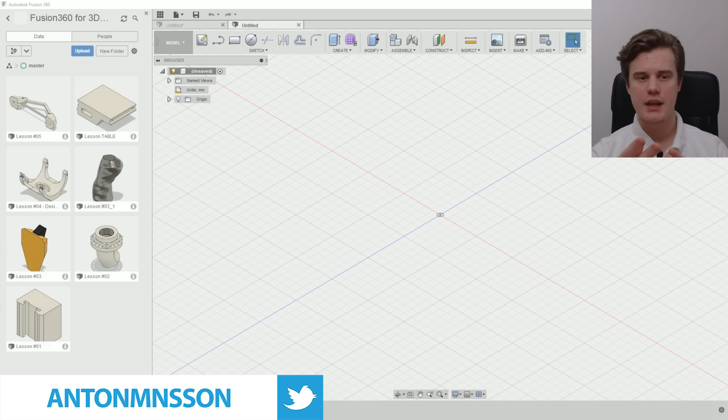Hi guys, so today we'll be exploring Fusion 360 with the focus of 3D printing our parts. Today I want to do a shampoo bottle. I'm going to combine and show you guys how you can combine a solid model, for example the cap, and then a free-form model or a T-spline body, which is a form. So I want to mix those two together and try to add as much detail as possible. So with that said, let's just jump into the software and start going.

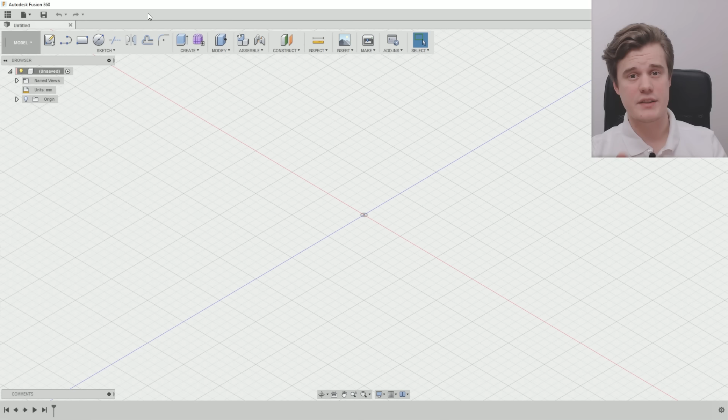Alright, so this is Fusion 360. You should be pretty comfortable with this software by now if you've been watching my videos. We have the previous videos here, at least most of them. So, a shampoo bottle - when I look at one, for me it consists of two parts: the more construction parts, the CAD parts, usually at the top, the cap which you twist on, or a lid, and then the rest is the body itself. So today I want to show you tools to handle that.

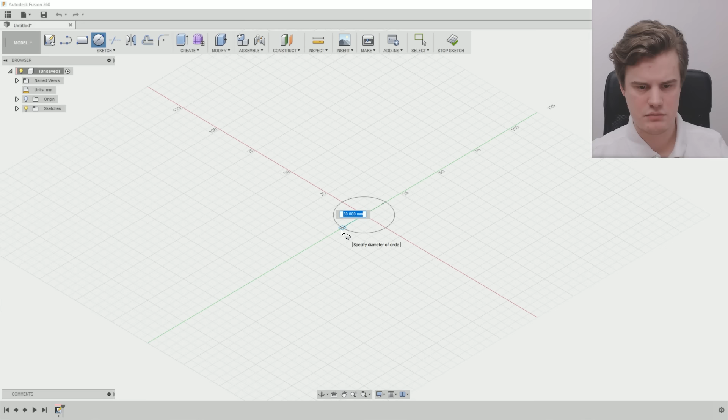I actually want to start off with a solid body. So for the cap, we'll go ahead and do a cylinder. I'm going to make it, let's say 30 millimeters - that sounds pretty decent. This will be the inside where we then put a cap on. So let's say 30 millimeters... it's a little bit tall, let's say 25 instead. So that's it, now we're finished.

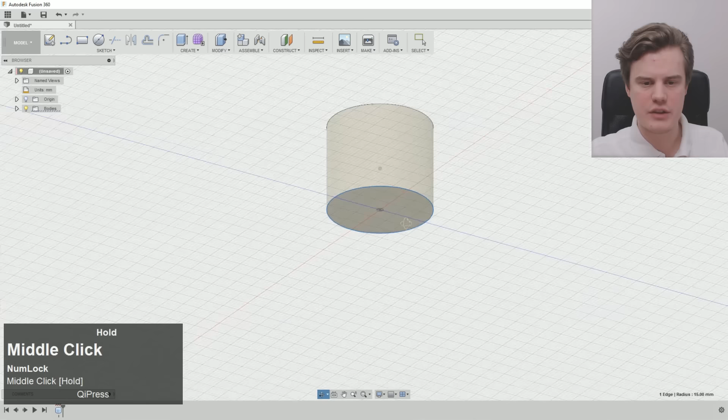I'm just kidding, we have a little bit more to do. The reason I'm doing this is because I want to have a cylinder shape, so I can then go back and stick my freeform to it. So this will be here, I will call this cap.

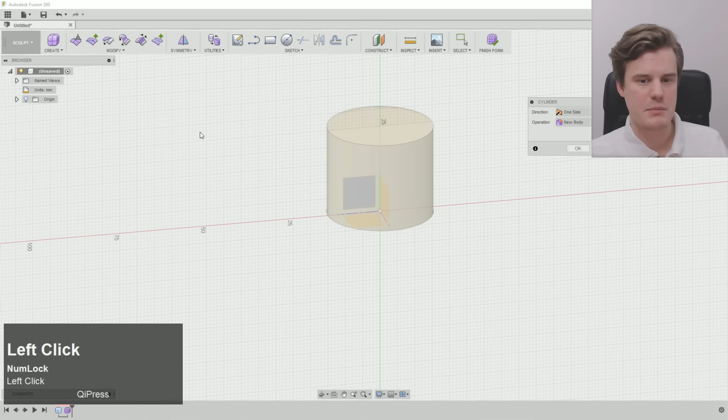And then we'll create a body. We already have tools for this - we can choose Create and make a cylinder. We can turn around here in the center, let's say maybe 70 millimeters, that's probably fine. Now it wants to build upwards, and I'm not going to allow that, so I want to go down. Let's say we have a printer that's around 150 millimeters tall, so let's do it like 100 millimeters down. Now you can see here that this is the standard tool.

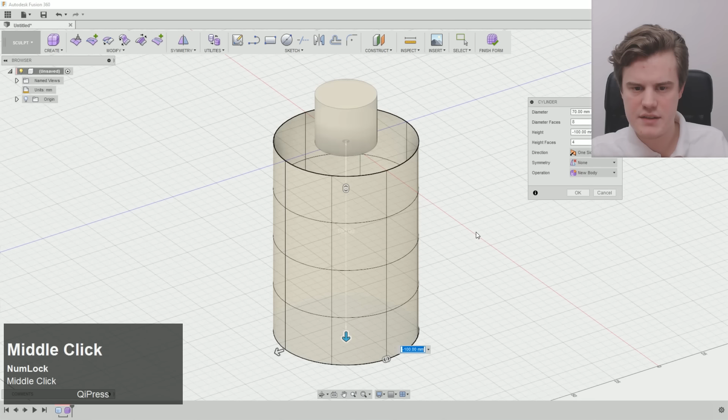I'll try this before. What we can change here is that we can actually lower the height. We don't need all of these shapes, at least not yet - if we want to add them later we don't want too much detail. Also with this one, I want to remove that one as well, put it to 6.

Now I want to have some symmetry. I don't want circular symmetry - if you wanted to do a 4-part bottle where every side is symmetrical, you could do that, but I just want to go ahead with mirror. Let's see here, length is the correct one. You see the green lines here? The green lines represent the symmetry. I could do it the other way as well, like this, but that's not good. You can do it in height as well, but no, we want to do it like this.

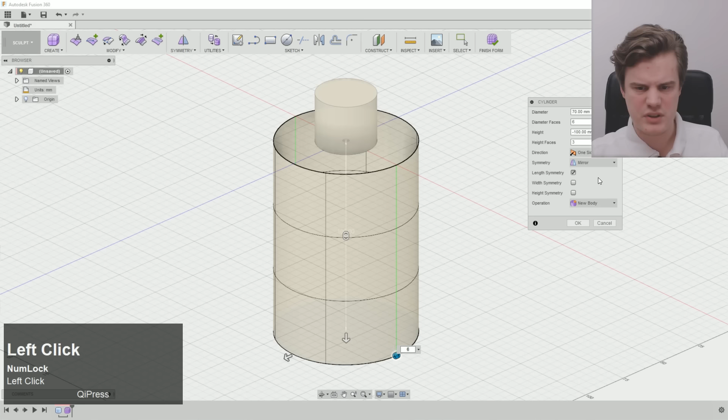That looks good, so we'll start from that. What I could do is hide the grid for this model. So the first thing I want to do is make sure I actually take this line here. I'm going to use a tool called... maybe we don't want to do that just yet.

Okay, so let's right click and edit the form. I'm going to double click here so we get everything. And while holding down Shift and Alt, I can actually create new edges - so we just created a new one here. So we have these ones here before.

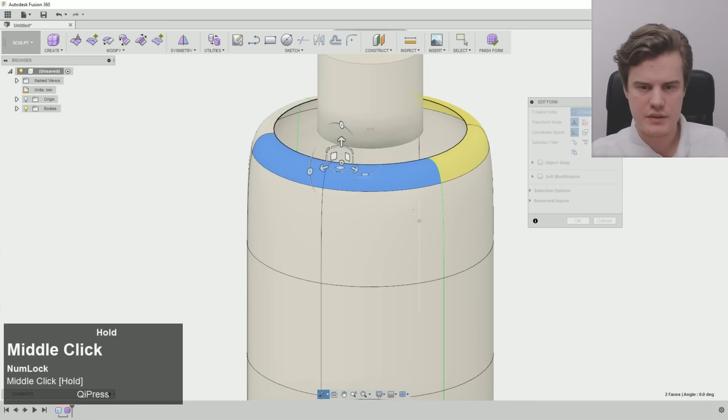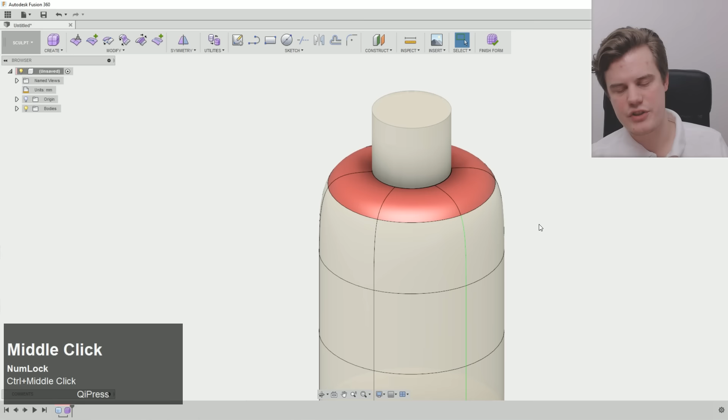Let's just say OK. This one here, we want to go up to Modify and use this tool called Match. With this we can match this edge to the previous cap model. I'm just going to go ahead and show you guys that. So we already selected these, we have them selected there. Target edge is this one. Ta-da! The red here is just because the symmetry won't work on that, since the cap isn't symmetrized - it doesn't have symmetry on it.

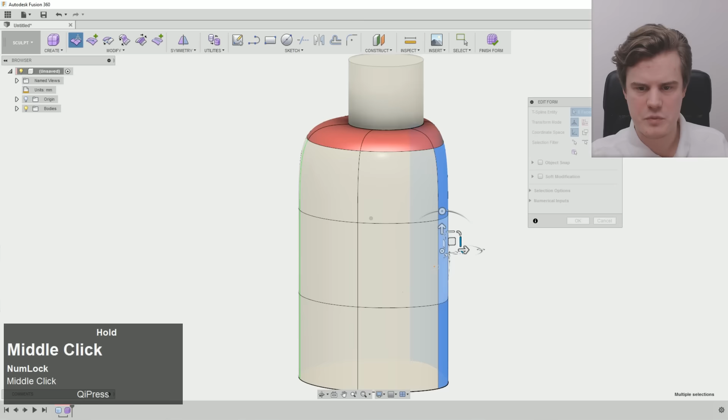Now what we can do is actually start modeling here. So I want to do a little bit of editing. I'm pretty sure I want these ones here to be a little bit more flat, because probably labels and stuff - most people put labels on their shampoo bottles. And these ones here, maybe we'll get a little bit creative and do something like this.

Move that in... no, we want it to be able to stand as well. That's true, good thinking guys. What happened is we moved that in - no, I don't like that.

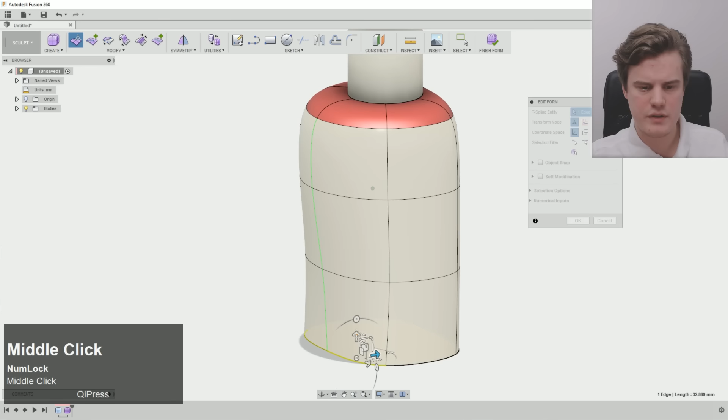Okay, so we can do something like this, just a little bit in. And I want this shape here to be like maybe a really strong shape, really well defined. And if I need to define an edge, I need to add some. So I'm going to...

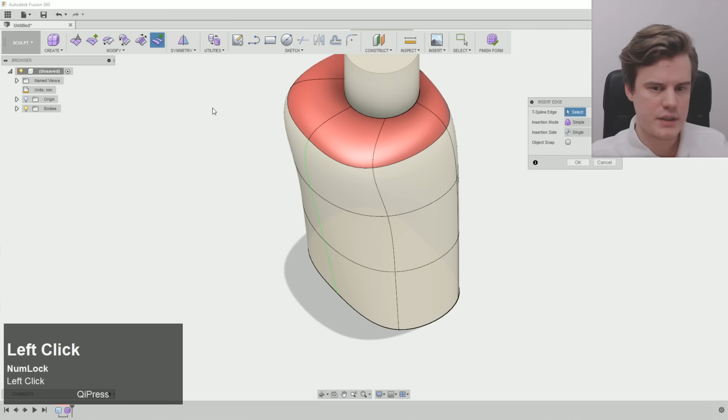Insert an edge. So insert it between, no, not in that direction. I want to insert an edge here, over there. Now we're getting some details there, and I actually want to move these ones forward.

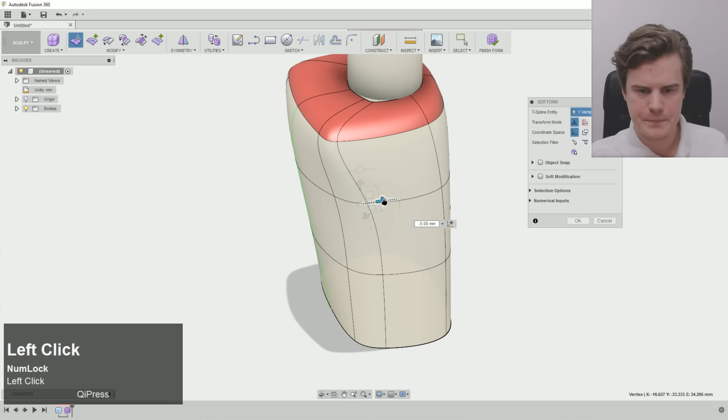I'm just trying to add a sharpness up here without having to use the crease tool. We could use that if we want to, but not right now. And I also want this edge to go in a little bit, like so. Maybe even keep that like this. Maybe.

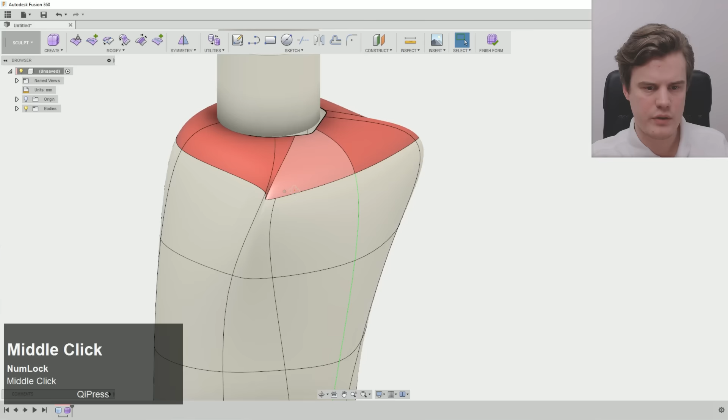So by this part, I'm just playing around really. There's no right way of doing this. It's just about adding details where you want sharpness. I should probably add an edge here as well. Can we do that? And then weld those points? No, that's not really what I was thinking.

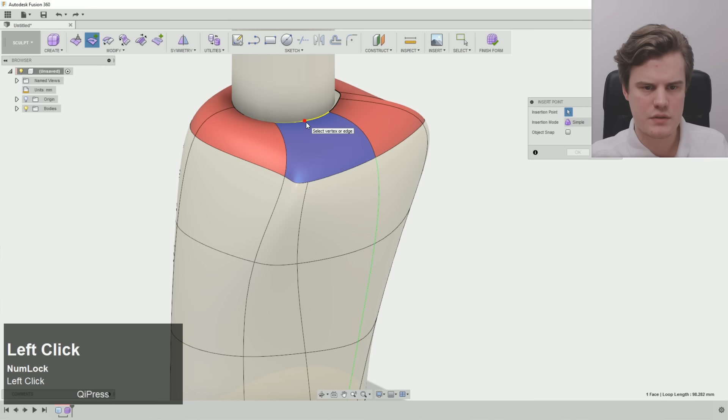I want to insert a point around here. Can I do that? Nope, that's not really good. I want to add it there. But I can't do that. Why can't I add it there? There we go. Okay, maybe it's because of the symmetry. So let's just keep working here at this one.

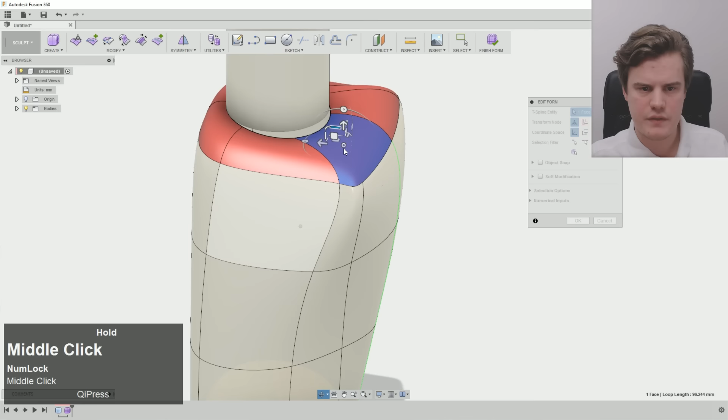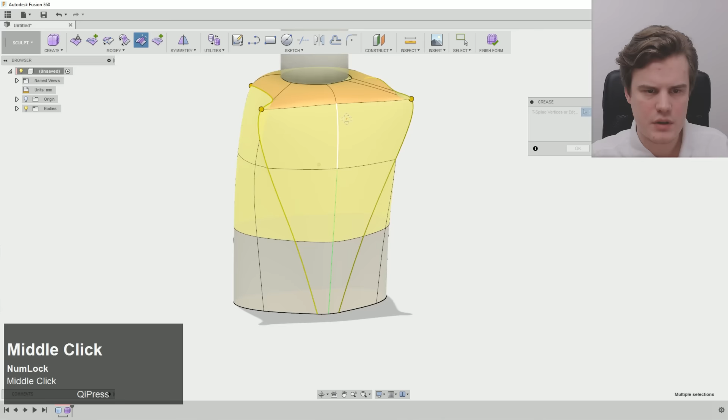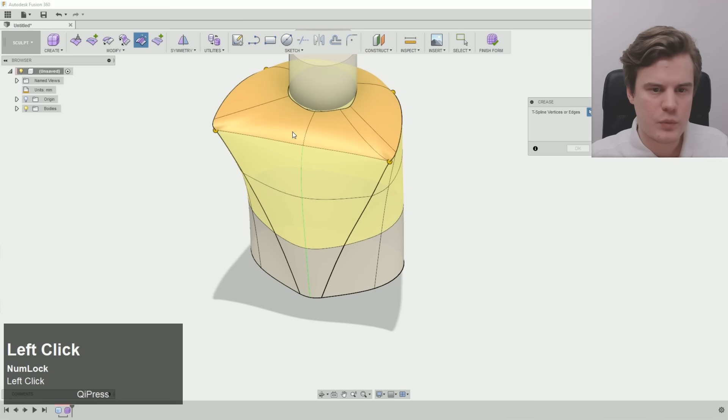Let's try creasing and see how that looks. So maybe we'll crease these ones here. I just want to see how it looks. Now we're getting somewhere. Maybe we'll go ahead and crease. Oops. We'll go ahead and crease this one here as well. That one is called crease. There we go. Now we actually get some modability here.

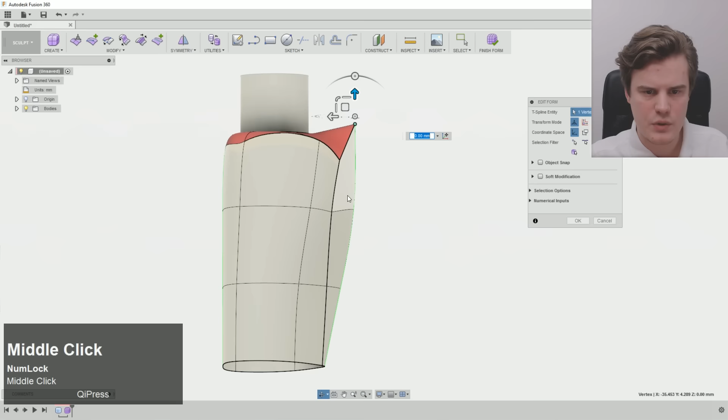Maybe something like that. Do like a big weird shape here. I'm kind of being artistic now. I have no idea really how I want this bottle to look. I just wanted to change the shape a little bit. Anyways, I'm gonna finish real soon, so you don't have to watch my creative process. That isn't really that creative at all. It's just something I say to make me look good or something. I'm not sure what I'm doing.

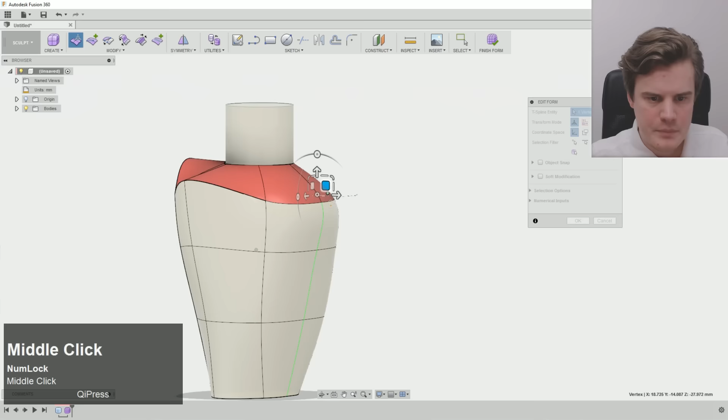Let's go with something like that. But no, this is just way too much. Let's put it like that. And what we could do is maybe add like those. Or should we go down with them? Down and in a little bit. Down and in.

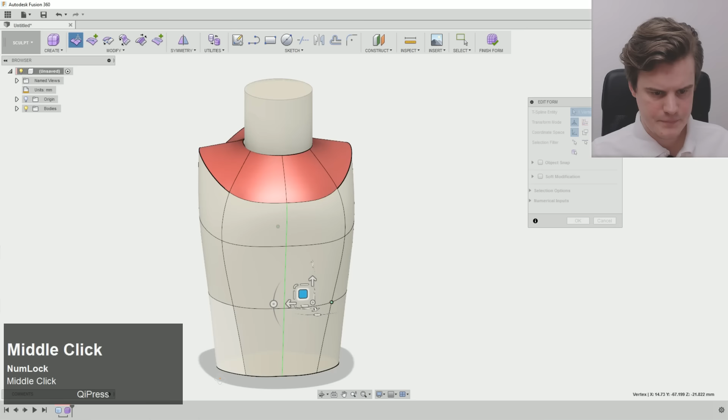It does look a little bit like a strong Superman or something. Maybe if we take these ones in even more. Maybe not a strong Superman, but a little bit like that, if we're really creative. Obviously, I'm not going to be a shampoo bottle designer in the close future, but I could be.

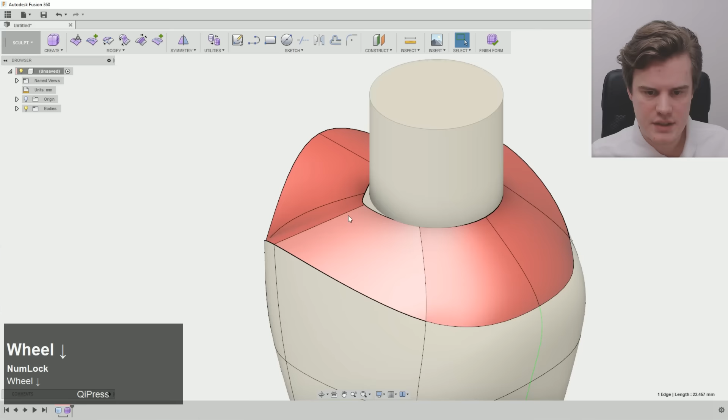All right, so let's just go through things here again. I do need to match this again. I added some edges, so we're going to do that again. You could maybe skip it the first time, but I want to match all of these again. Select edge, that one, perfect. There we go. It's still symmetric.

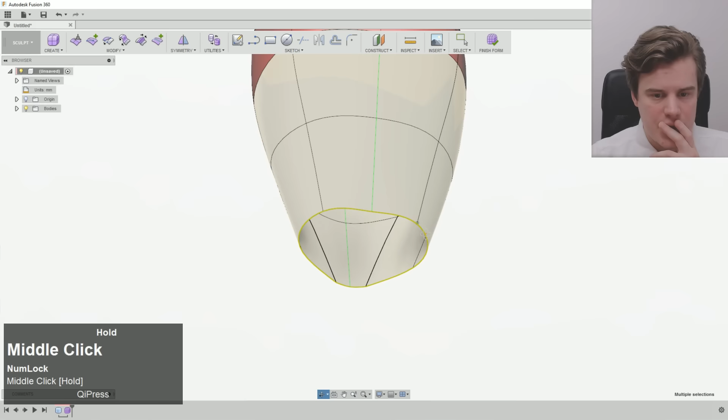They will be fine. What we want to do is fix these holes. So I want to go up to modify. I just double click here on the edge, so I select the whole edge. We'll go ahead to fill hole, which we have over here. Fill star, I guess. Yeah, I guess that works. Usually these are the presets, but I don't really like either of them. So I'm going to go with fill star.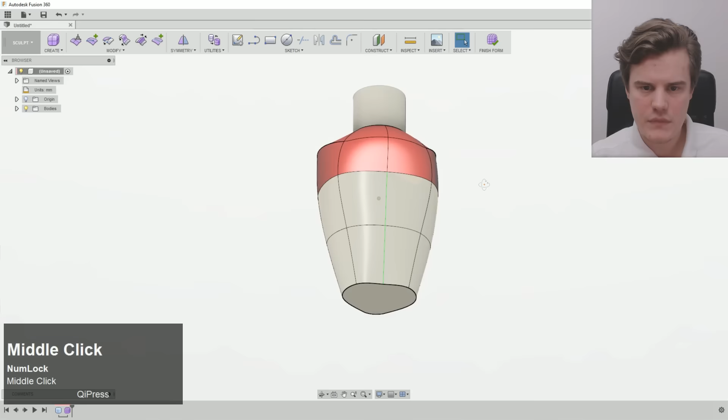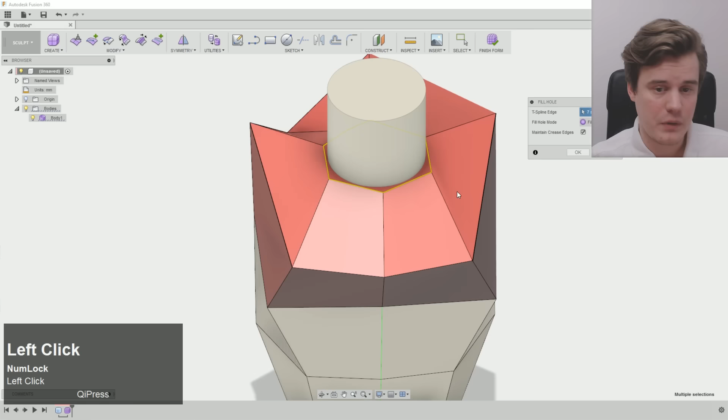And the most important part I found is that you actually, let me just hide this body. I can't have that body. You actually want to fix this one up here as well, because we're going to do some exciting tools. Let's see, where did we have it? Fill hole, there we go. Wow, yeah, so this one, maybe collapse is better. Yeah, let's go with collapse. So there we go. Now we have matching shapes.

I'm going to click finish form. I'm not going to click finish form. I'm going to, oops, okay, I'm going to go back here. Something broke. Let's go back and edit. So let's go to repair body, auto repair. Let's see what happens. Is it okay now?

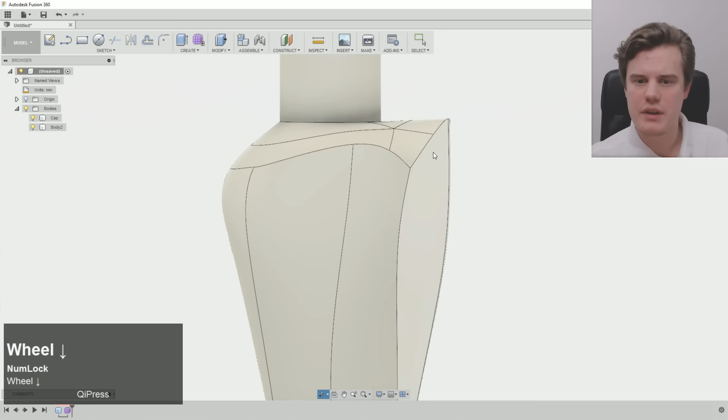I'm guessing it has something to do with these edges. They are kind of collapsing on themselves. Did that work? That worked. Awesome, so auto repair is good. Now this shape here is a little bit tricky. So it was going, it's actually part of this one. You can see that it repaired using at least one shape. That's weird. Well, it works. That's the most important part.

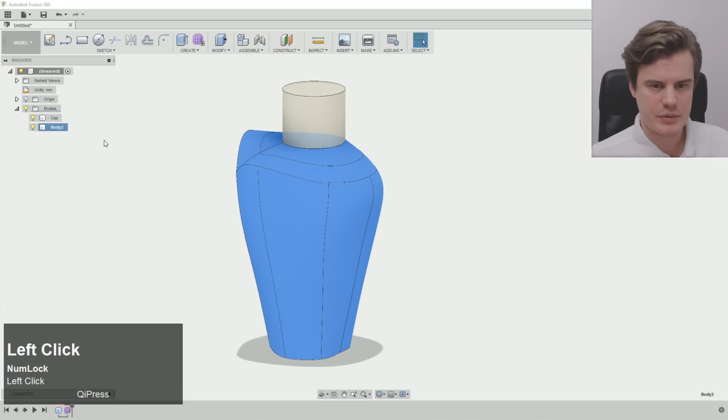So what we want to do now is that we have the, yeah, this should be called body. So body and cap, we have those two parts. Next thing I want to do is to actually join these two parts. So I want to use combine.

Or actually I could do like this, just to make sure that there are no gaps. I will go into this model and have them join. Ta-da, now we have one model. And we can call this bottle.

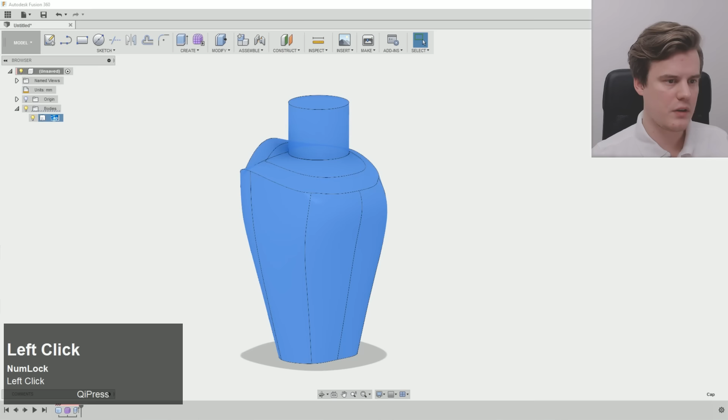Next thing I want to do, you can see now that they're actually joined together instead of just combining them. I believe that's better because we make sure we have the cylindrical shape going into the real shape here.

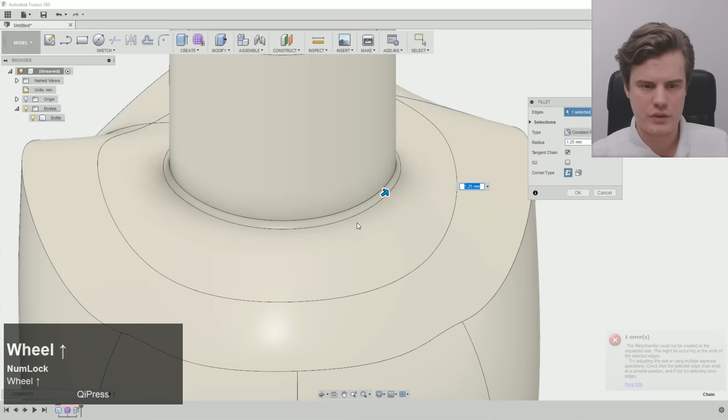If you are designing for industry or something, you might want to do a chamfer. We can actually do that, so let's just keep that chamfer. It's pretty cool. You know, I like chamfers.

All right, so next step here, still one body. Let's just do an inspection of the bottle itself and how the shape is looking. By doing this, you can actually sometimes detect errors that are difficult to print.

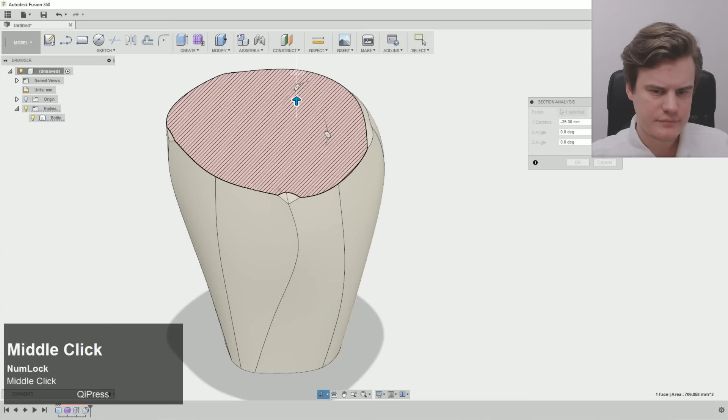You can see here, this actually looks a little bit different. It's probably the auto repair. The auto repair breaks symmetry, it seems, so that's something to remember. I don't want to fix that now, or do I? No, I don't want to fix that right now, but you could go back and do that.

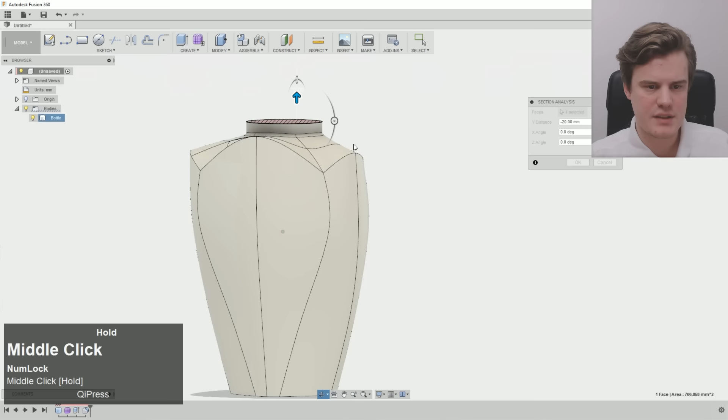So I just want to check the symmetry and make sure that we have some overhangs. I'm guessing this shape here is probably plausible to print. But okay, let's go with that.

Now, next up, we want to do something called shell. Click on the model. I found that when you do this inside, I was having a lot of issues before. 10 millimeters is a lot.

But you can see the inside shape there. I guess I fixed this shape better by using the chamfer. So let's go with 2 millimeters thickness. That's pretty nice.

Something like that. You can see the rounded shape there. That's good. Let's go with 2 millimeters.

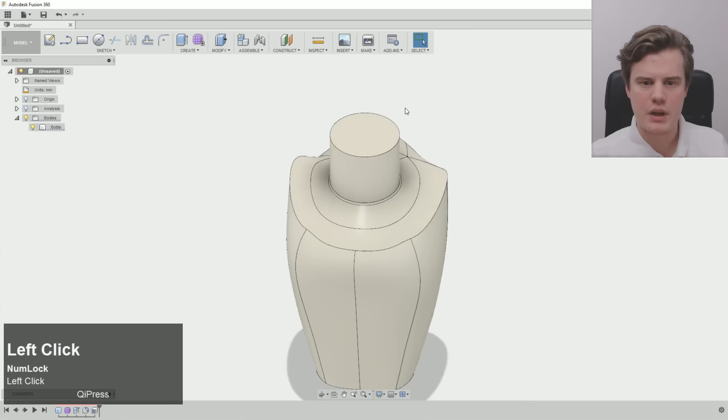Now, what we want to do now is actually create a sketch on top of this, and we make a hole for the bottle to go in.

So let's say around that. Oops. That didn't go as planned. Okay, so this one isn't totally flat. Why isn't it?

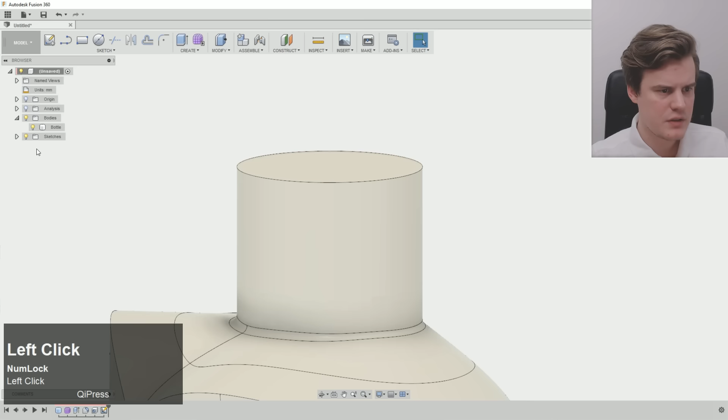Sketches. Can I extrude this? Yeah, I can do. Okay, let's just do that. Let's just extrude that a little bit.

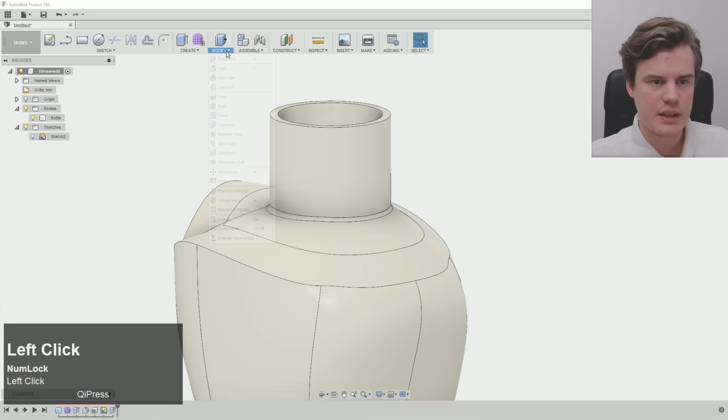Smart. So now we have a shell here, and the last thing that we want to do is to create a cap for this one. So we can go ahead and go into the thread tools.

Actually, we're gonna save it first. Episode 6, I think. This is probably episode 6. I don't really recall.

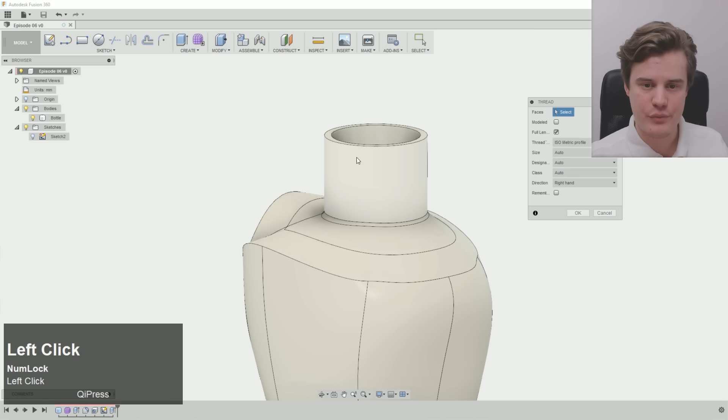So next up, we go to modify. Sorry, we go to create and thread, and select this one. Now it's a good idea to not select full length because we don't want it to go all the way down. We want to be able to control that. And model is pretty cool.

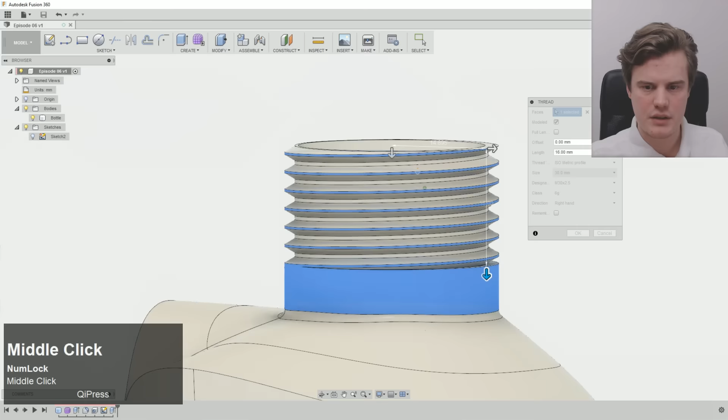Let's see, we might be able to need to push this inside a little bit here. But let's see here. Can I do like inch pipe? Like super big? Oh, nope, that's not the one.

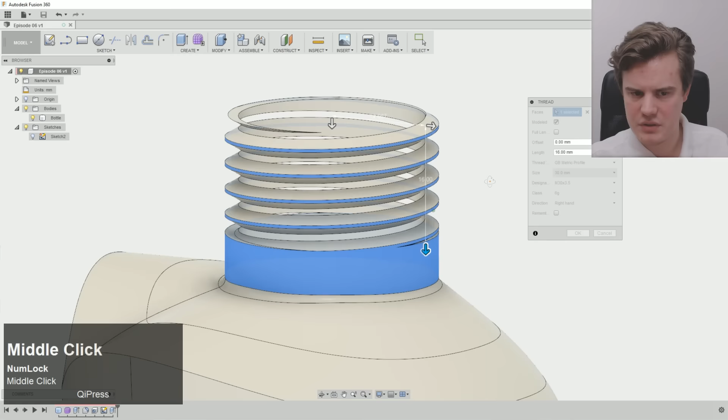There's probably a standard here that I could work with. 32? Okay, let's just imagine that we know what diameter, or sorry, what size this should be, the thread. Thin pipe thread?

I want to have like a super, there we go, something like that, but a little bit bigger. Oh, there's no bigger ones. Maybe this one, if we can get it. Yeah, that's awesome. Now we go. 0.3? No, 0.7.

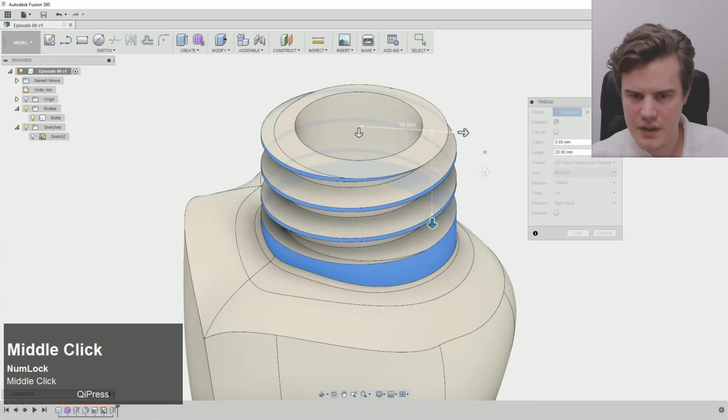Now this looks cool. It's probably not even close to correct, but it looks cool. And that's the most important part, right? Cool. So we have that.

Now I'm a little bit unsure about this part, but I will try it. So let's create some sort of bottle here. You want to create a cylinder. Onwards, that, in center,

Outwards, so, and then up. We don't want it to cut, we want to make a new body.

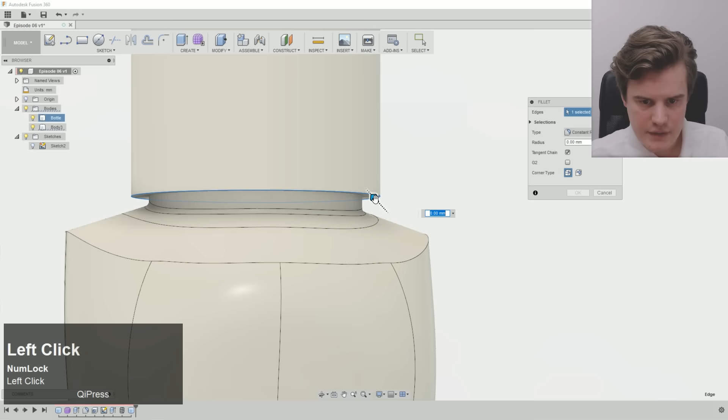Awesome, let's have a little bit of a fillet on this one, because fillets are awesome. And also a little bit of a fillet up here. Let's see how much can we do. We can do a lot.

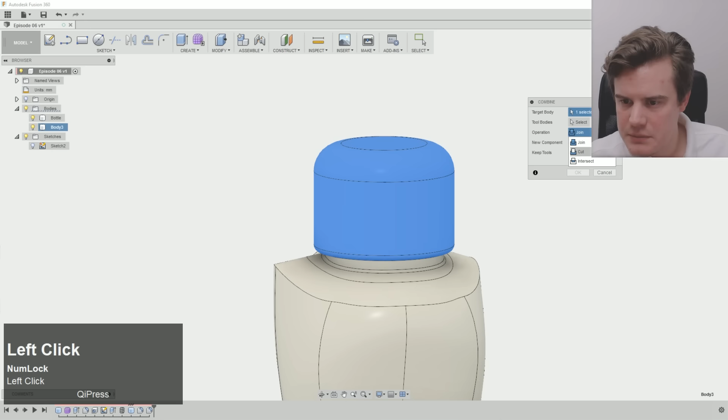Let's do like that. Now, my plan here is to combine these two. So I want to have this one. Use combine, but cut, keeping the tools.

So, no, tool bodies. No, wait, that's wrong. Target body, tool bodies. Keep tools. Awesome. So, in theory, we do.

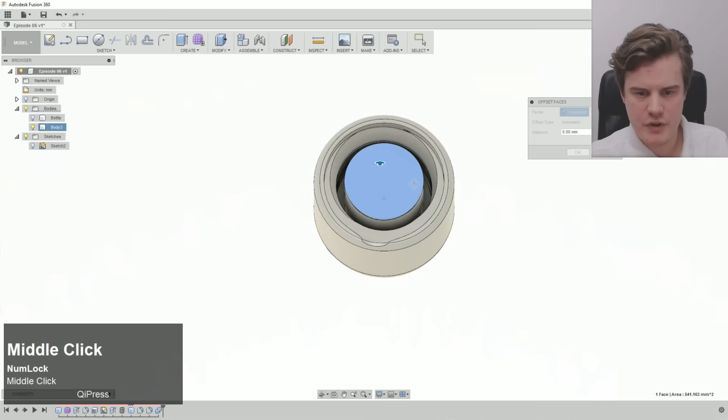Okay, can we just press pull this away? Nope, I guess we have to extrude it then. Do we get like a really weird surface now? No, that's good. Okay, now we have a cap as well.

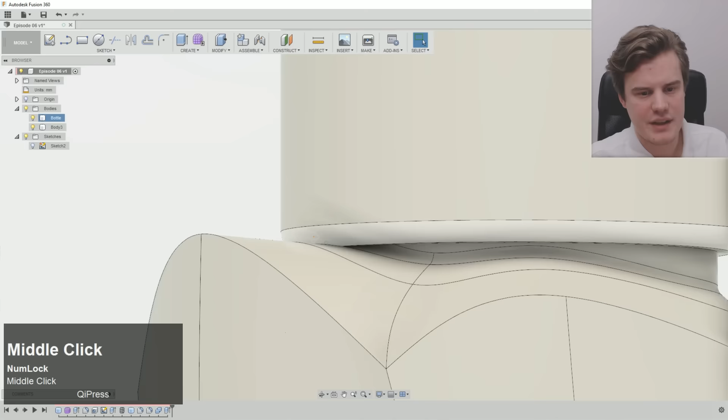Oof. But this shape here is interesting. It's probably... okay, I was a little bit too close there. So let's go back to the cylinder, just edit this here. This is the beauty with history, that I can just change the position of this one, I suppose.

Okay, no, I cannot, but I can roll back history there. I can add a movement, right? Please tell me I can do that. I can add that movement and then go further. There we have it.

So now we don't have those mistakes on this edge here. Awesome, so now we have a cap. That should probably be a separate component. Let's call that cap.

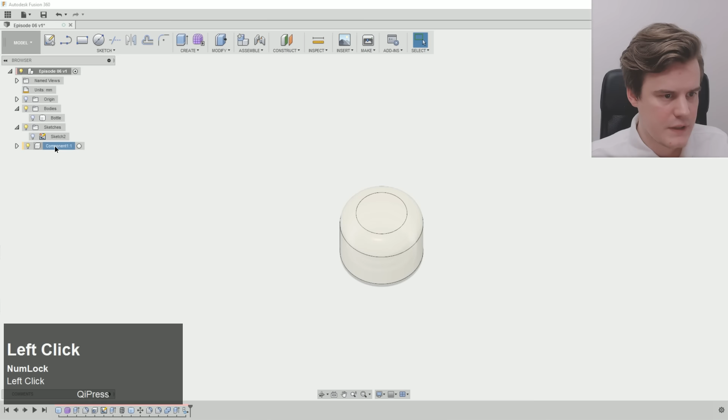This here should not be called episode, but it's actually bottle. I can rename that, but I cannot. All right, so there we go.

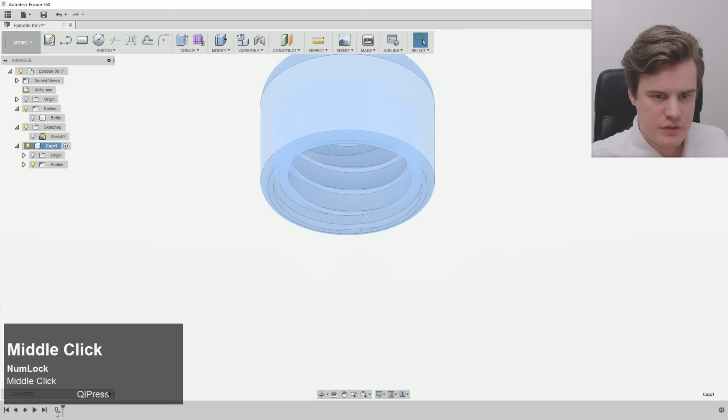That's it. I haven't really understood yet how you can create margins on threads.

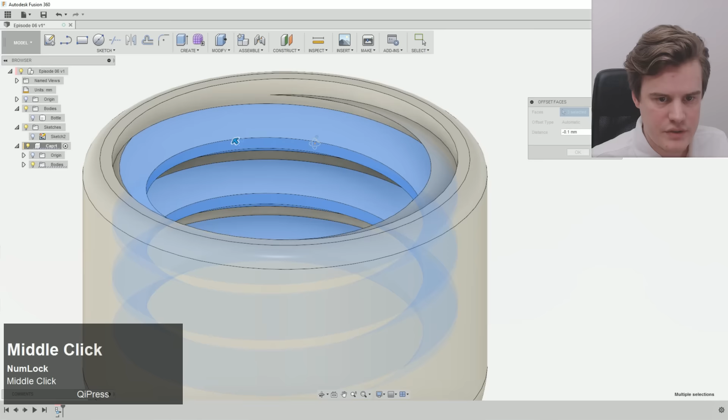I haven't seen any way of doing that. Let's see, minus 0.5, 0.1. Maybe this could work. It actually seems to be working. Okay, so I do have a way of doing it. So I'm just going to add some margins, so when we tighten this after printing, it will probably hold up a little bit better, hopefully.

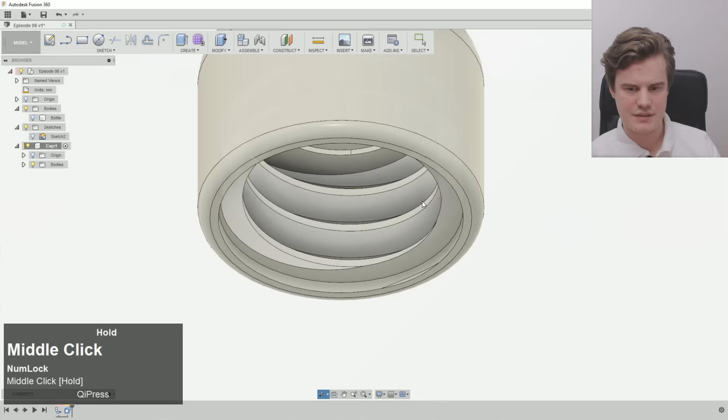What is this? Why do you still have this one here? That's not right. Oh, okay. Let's go back to working on this history.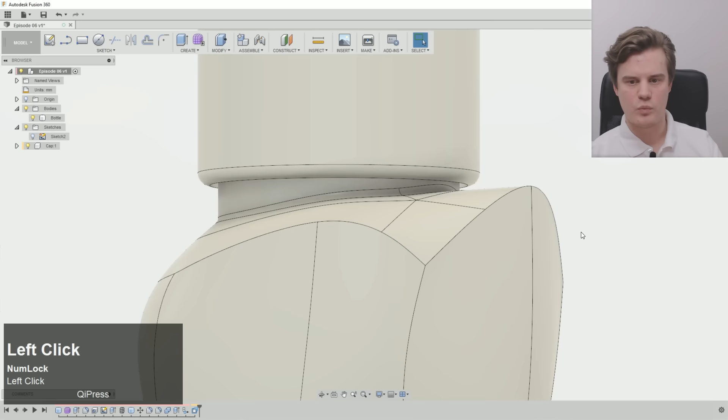And we edit this movement, edit feature, up. There we go, now it's free. And voila, everything's back to normal. I just love using the history and making things work.

But now we have another issue. This is actually - that's not good.

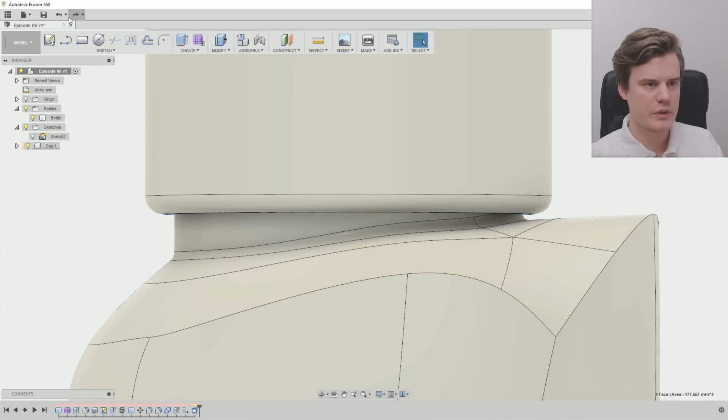No, okay, let's do that as we did, but let's change this part. Sorry, on this one, I want to change the thread, edit that feature. I don't want it to go that far down. I want to increase it a little bit.

And that should mean that we get a better edge here. No, it doesn't. It's weird. Okay, maybe I can push this in. Yep, we can do that.

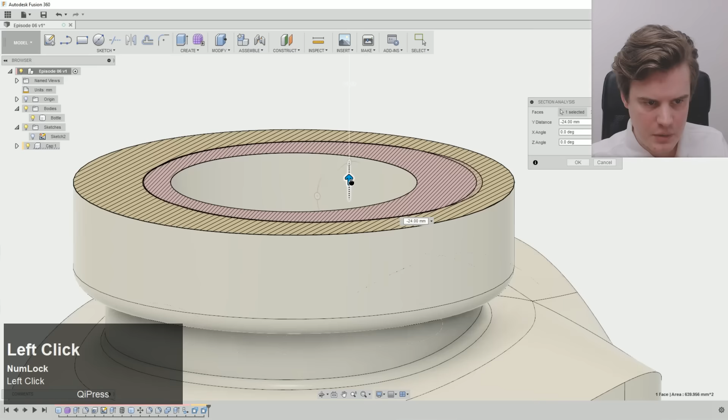Now let's just do a section analysis so things aren't pushed together too much. From this and down, do we have a margin? We actually do have a little bit of a margin, right? Or do we? Difficult to say. There's a margin on most parts.

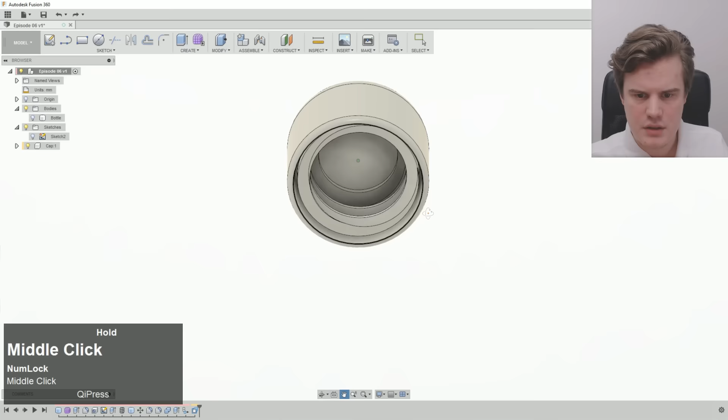I have no idea if that works. Okay, let's ignore that change that I did. The press pull, I think that's a bad idea. And let's just create...

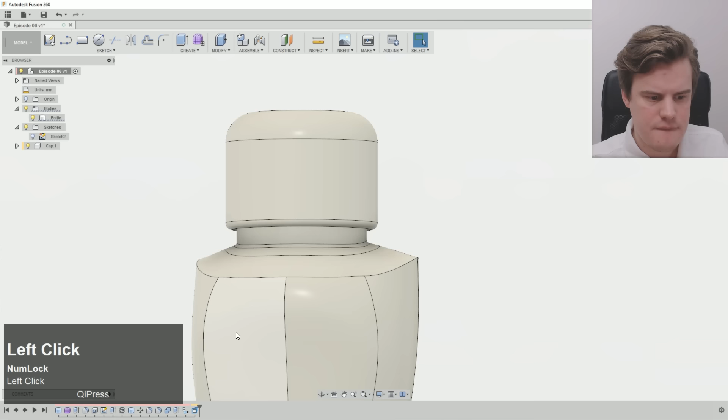Because if we look at these now, we do have some space here between this and this. I wonder what feature that is. Is it this one still?

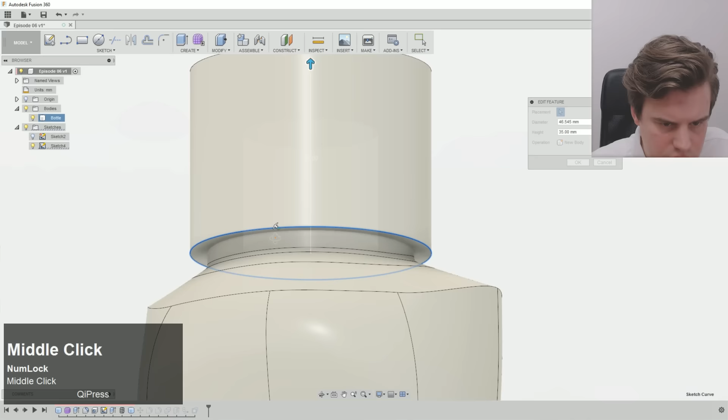Because if we do like that, this cap here is still - let's edit that feature. It's still a little bit tall, okay. And if we edit this feature, let's just drag it down a little bit and see what happens. Because it's now touching over there, but is the cap - the cap is now correct.

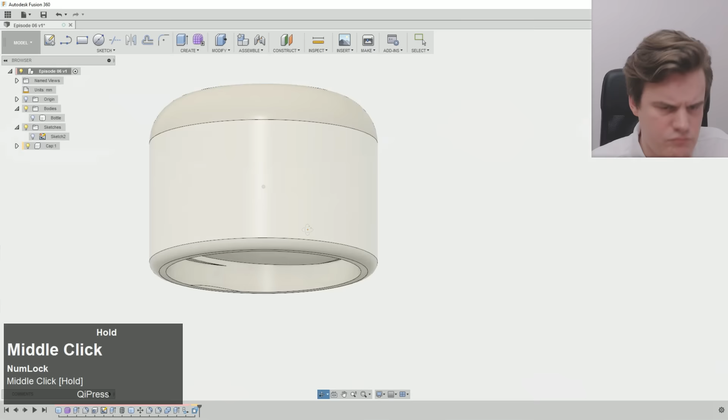Let's just leave it at that, and let's do a final inspection here. Section. Seems to be a margin, seems to be better, and when we go down there, we have some free space. That's awesome.

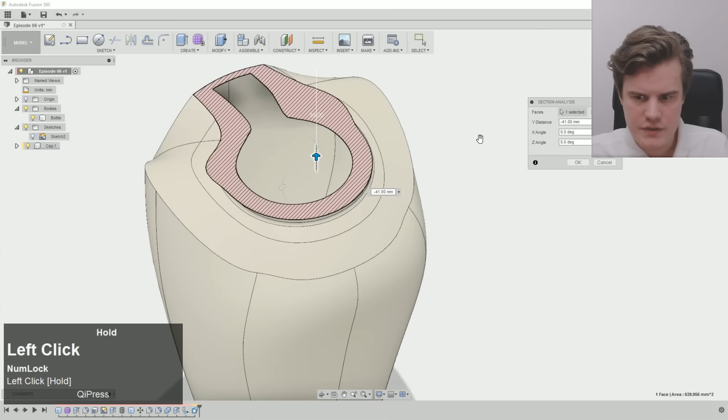Awesome sauce, so that's good. Seems to be working. We now have - oh yeah, sorry, what we want to do is to take the cap. We want to move it. What's that called? Let's just get the grid here again. We want to rotate that 180 degrees.

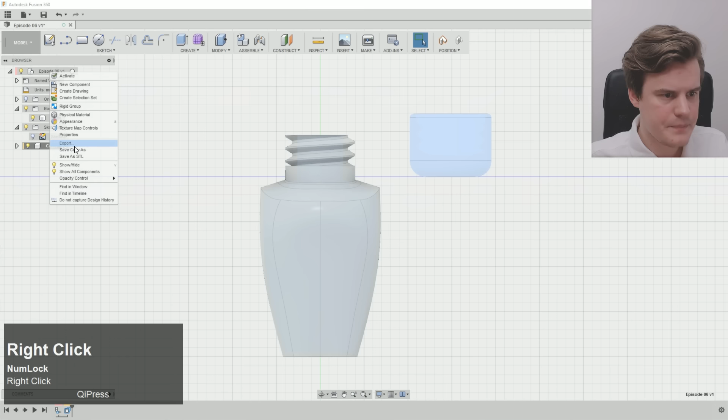Bodies - oops, actually we want to move components. There we go, move. Let's make sure that it is flat, it is. Now let's move this component, or actually this body. Move that up, ta-da.

We can print them a little bit closer. There we go, now we can print both of them at once.

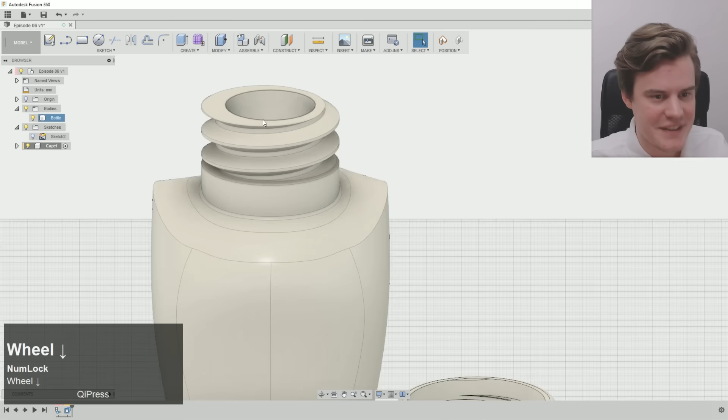These threads are seriously dangerous, but it could work. Can we do a fillet on them? Because I like fillets, I really like fillets. No, we can't. Never mind. Okay, there we go, that's it.

That's all we have to do. I'm going to capture the positions and save. And that's it for this video, I suppose.